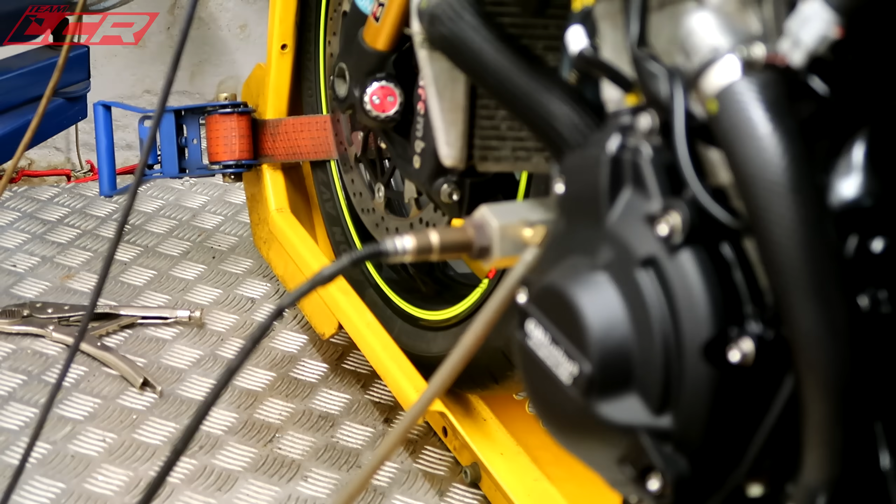So what we've done, we've pulled the information off the ECU onto the software on Mr. X's laptop. So that's all the map information from my ECU. Now he has to map the bike, run the bike, see where it's lean, and then make the adjustments here, which are then loaded back onto the ECU.

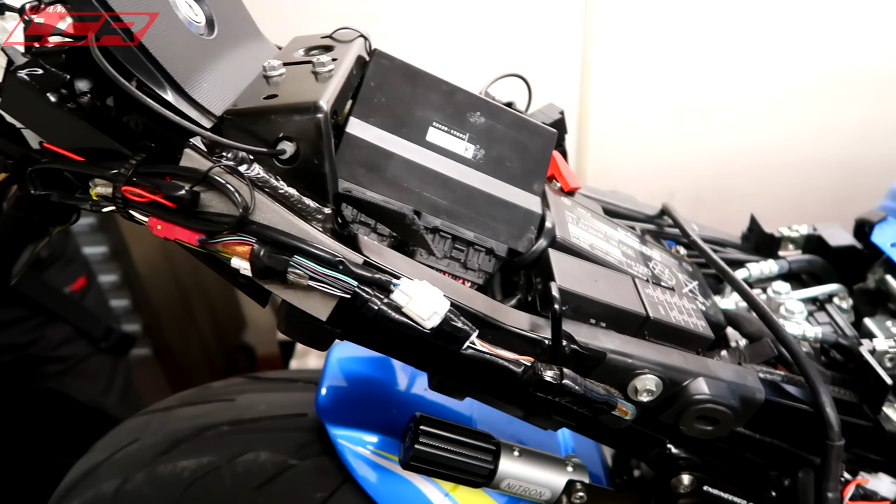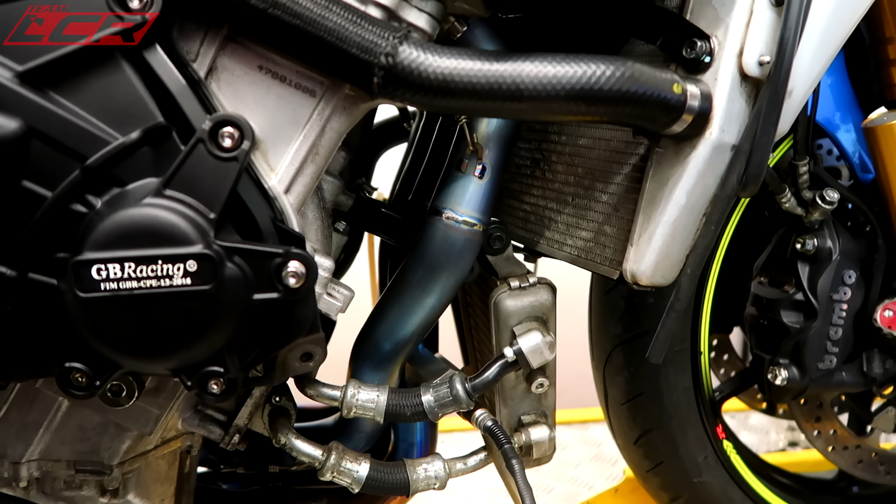This is going to be tuned per cylinder, so it's not tuned at the tailpipe, which is where all of the headers gases combine. This is actually being mapped at 2 cylinders - I think it's cylinder 2 and cylinder 4 because they share the same map. Every cylinder has its own map on the stock ECU, so you have to map each cylinder differently, but because the map for cylinder 1 and cylinder 4 are more or less identical, and the map between cylinder 2 and cylinder 3 are more or less identical - I could have it the wrong way around actually - there's 2 of them which are more or less identical, so we're mapping at those particular cylinder levels and then just replicating that map to the other of its paired cylinders.

But just looking at the information from the dyno printout, the air fuel ratio at the exhaust is completely different to what you're picking up at the actual cylinder itself. So one of my cylinders, I think it's cylinder 2 or cylinder 4, is really lean - off the scale at some point with how lean it is, whereas what's coming out at the end of the exhaust is okay because the other cylinders are compensating. But it just goes to show you really need to map at the cylinder level to really know what's going on. Ooh, another Suzuki.

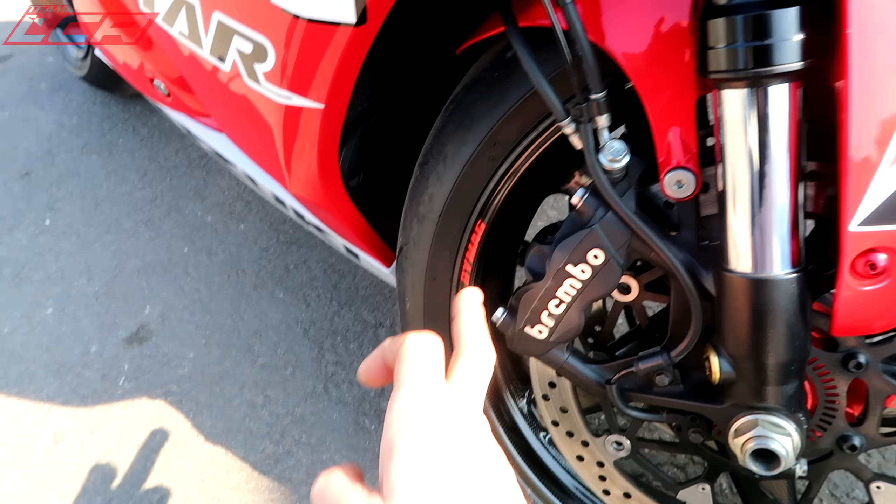Gonna have a little spin on this, because this is Tom's bike. It's been mapped already by Mr. X. He's also got the Dymags on it, which will be going on to mine shortly. But yeah, so it's very similar - it's got the full arrow system, but it's lovely in a really rare red. It's only 200 into Europe apparently of this red, because it was mainly made for the American market, but I didn't realise it was actually metallic.

It's nice. We're going to have a little spin to see what I can expect from mine. Hopefully mine will be very similar to this, but this has got the Dymags on it, the full arrow system, which I think is slightly louder than mine. There's a big outlet on it, and it's in this lovely rare red. He's done a bit of work to it - carbon frame guards, carbon surrounds. Oh, it's gorgeous, isn't it?

Carbon tank covers. But it feels different to mine - it feels different, because mine's got the Gilles clip-ons as well, so mine's got different clip-ons to this. I think this has got the Enduro tank cover, so it sticks out further this way - that's what feels different.

Oh, the direction changes. Wow, that is much lighter on its feet than mine. It's definitely smoother on and off the throttle though. God, it just wants to drop into the bends with these wheels on.

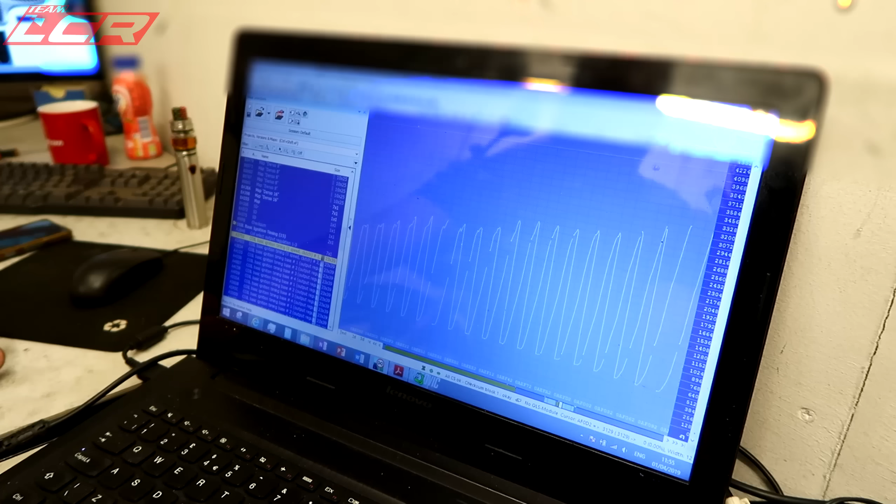I don't know if you can hear just in the distance there, that's my bike on the dyno at this moment. So what we've done, we've pulled the data off the ECU. Mr. X has now made some adjustments to the map offline, so plugging the ECU back into his laptop, here it goes,

made some adjustments. Now they've then been written back to the ECU, and we're doing the first run on the dyno to see how far out we are.

What we've done is we used the map from Tom's bike, Tom's GSXR, with the arrow, thinking it would be close, but actually because the Predator headers have that extra bit of pipe work, it's actually quite a long way out, and we're having to make more.

Actually, a couple of the cylinders are really lean, so we're having to make a lot of changes, sort of 10-15% extra fuel at the mid-range to bring it back in the right area.

And then this is the first run, so there's going to be more runs to get it absolutely spot on, but this is where we are after that initial first changes. Could be a long day.

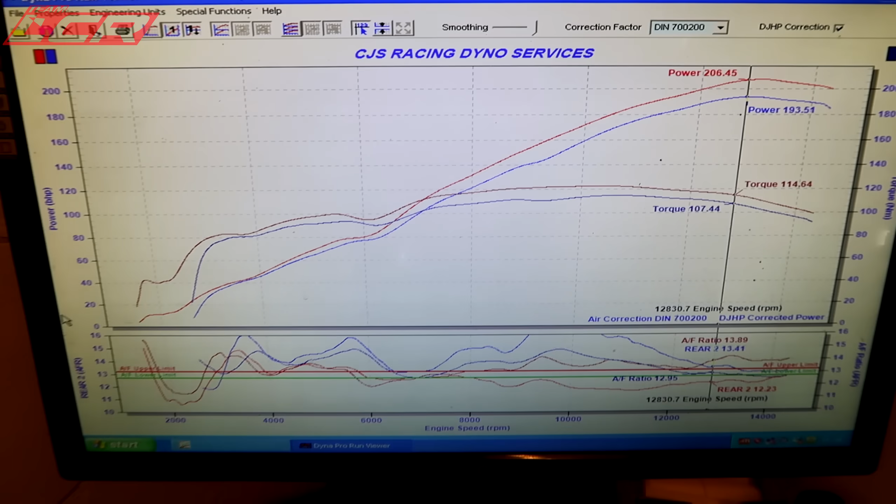So is that before and after you've got on there at the moment, is it? That's before and after at the minute. Christ, there's big old changes already then, isn't there, with that first run. So the red is the current, the blue is the old cylinder fuel ratio.

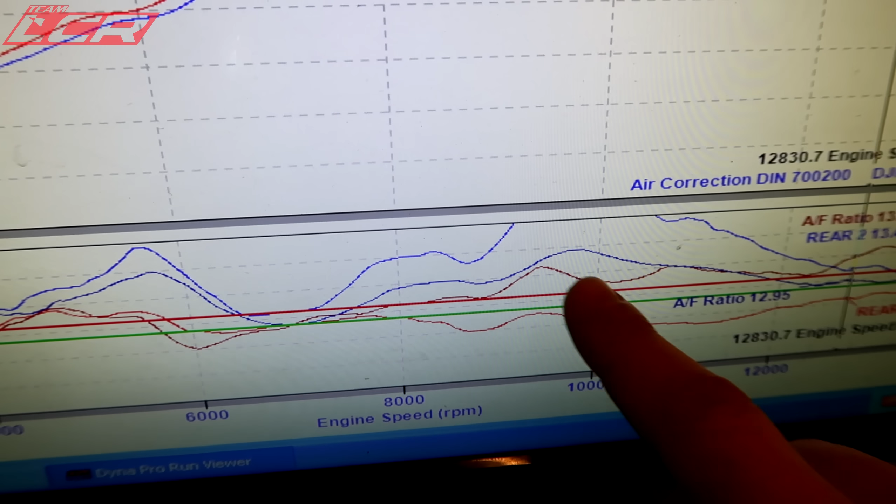So you can see on the old stock map, it's off the scale on leanness. And this after the first run, which has been done, and the first corrections, we're getting where it should be now. So a bit more tuning, which is even nicer.

Okay, time for another run. Tweaks have been done. They've been loaded back onto the ECU. It's a manual process to smooth the graphs out because you've got different maps with different throttle positions.

So the full power run is one thing. That's easy enough to do, to set your fueling and get the full power right. But you've got to get partial throttle, 50% throttle, 12%, 75%, and that's all the different maps. So Mr. X has done that.

This is the second proper run now, so the ECU's back on the bike, it's been updated. We're going to run it again now, see how the graphs look, and it may need a bit more tweaking and one more run until it's finalised. But she is getting there, and already the fueling is so much better. I'm quite excited.

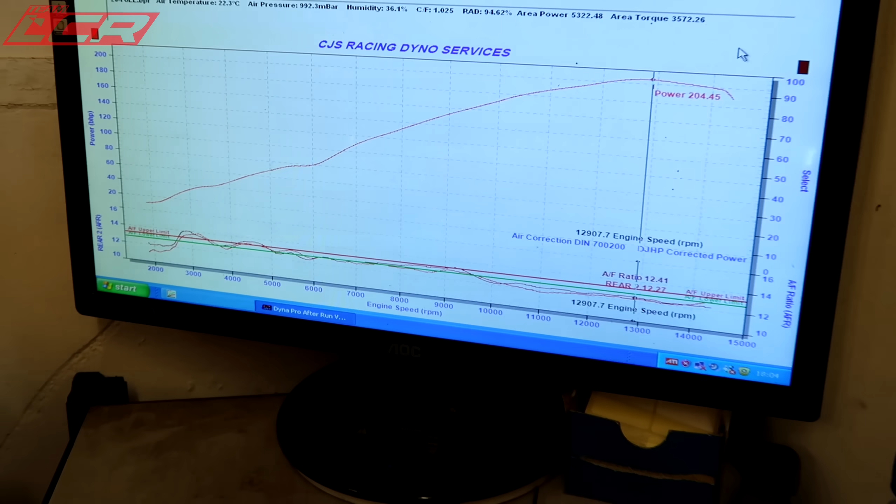Cylinder 1 and 2 perfectly mirrored.

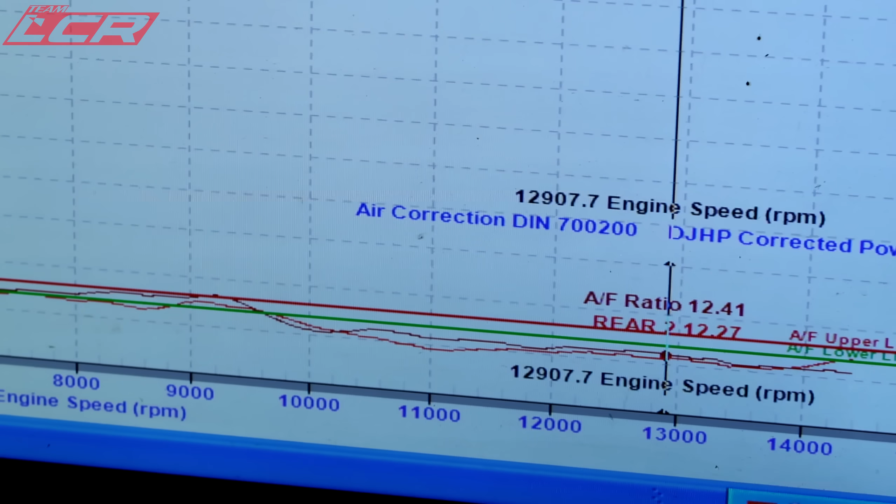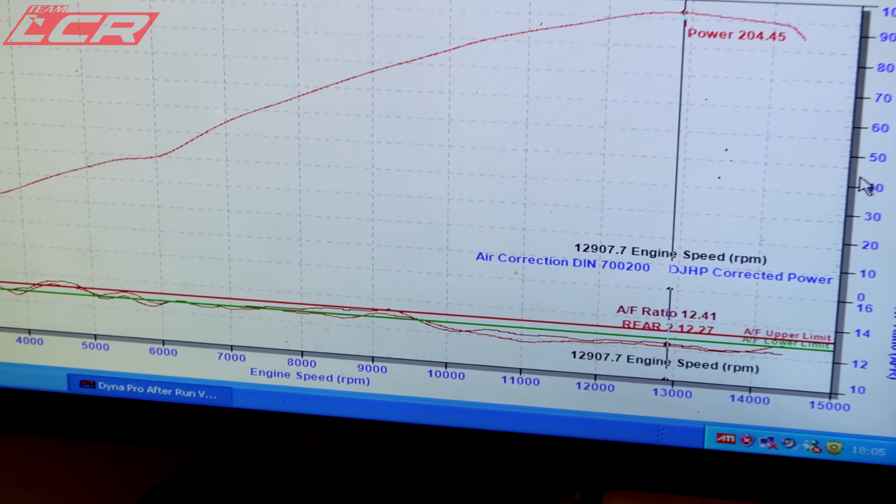Right between the red and the green, very close to it. So from 10,000 revs, I'm going to take out 4%. And that should pull that one in, so I'm going to adjust that now. It's a much smoother graph, isn't it, as a whole?

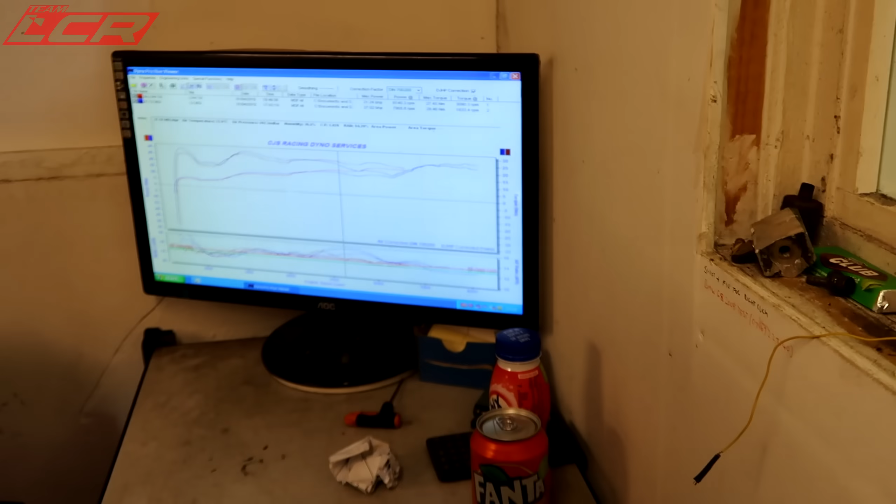Okay, hopefully the final run now after tweaking. Fuel curve's looking really good now, so there's a couple of areas we want to work on just to get it absolutely perfect. But I think full throttle power was sort of 204 last time, 206 originally. Obviously it's getting hotter in the dyno room, so that affects that. But she should be spot on after this run, hopefully. So literally on our 12-degree run, which is where I wanted to improve it.

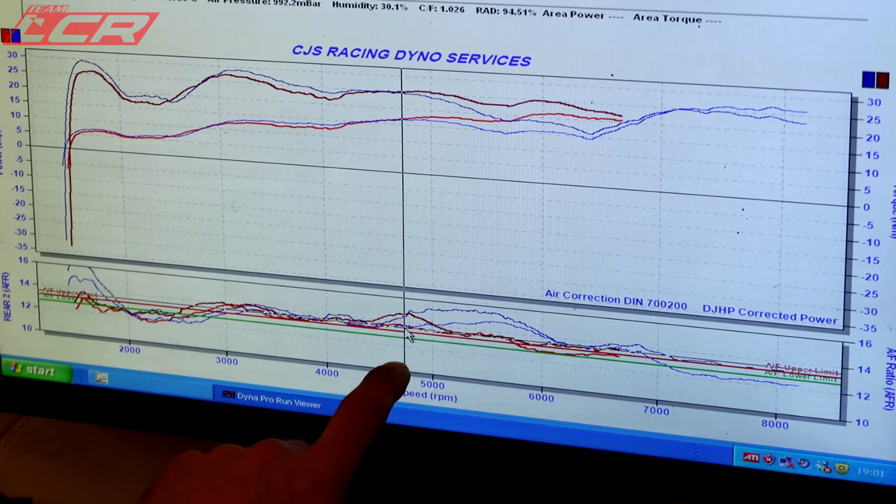Remember, first of all we had 2 humps, didn't we? Yeah, and then we had that 1 hump. Now we've got no hump, but we've still got 4,600. We still need some gasoline there. Oh, really?

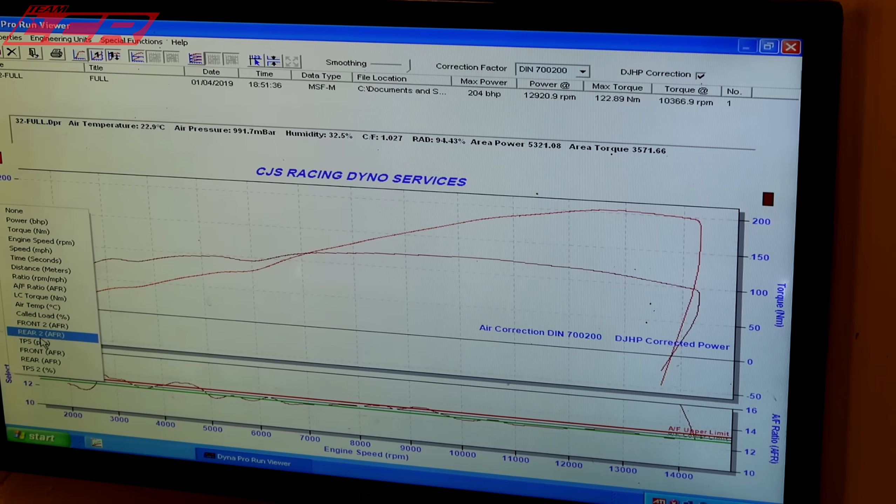So that is cylinders 2 and 3, and that's cylinders 1 and 4. Absolutely flat. Look at that, that's really... Look at that. And what was it for 4? Can you bring out what it was before?

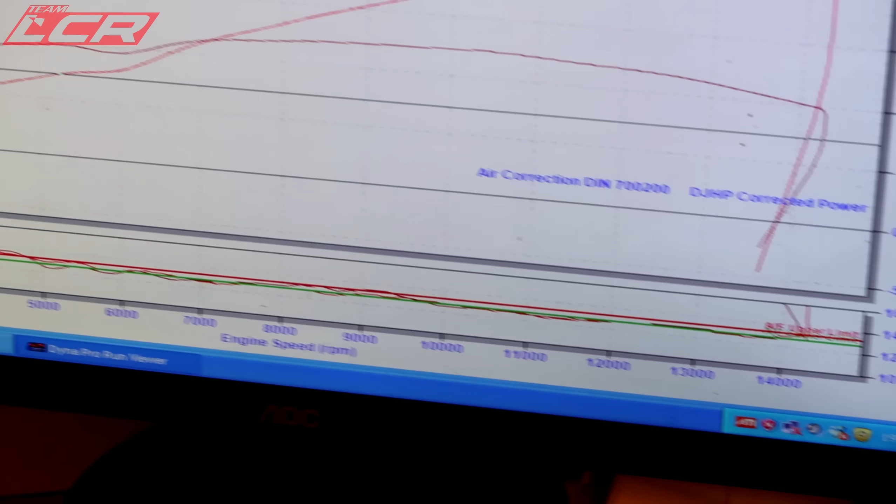Originally when it came in, that's when it came in, the purple. Yeesh, that's the 2 cylinders when it came in. So what one's that's off the scale? Is that cylinder 1, is it? Yeah, cylinder 1. Cylinder 1 was off the scale lean.

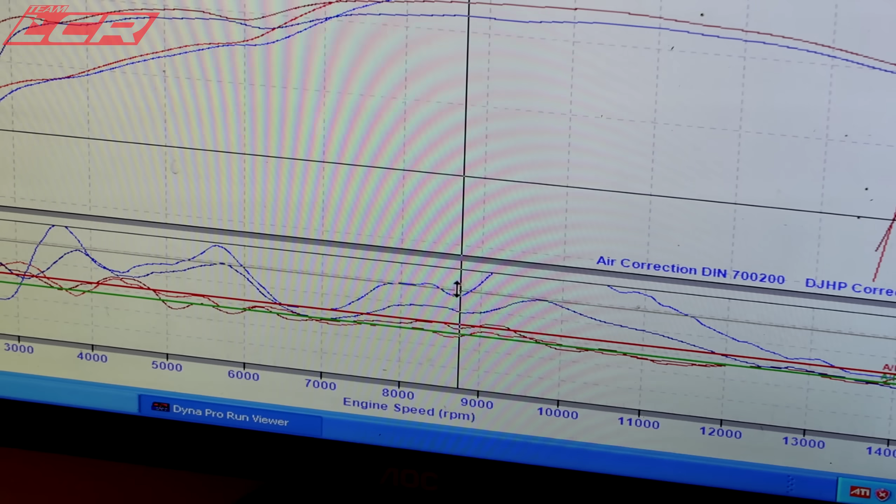Right, so final results. I know you saw basically what power it made there. So she made 104... one of the runs made 204 brake horsepower at the back wheel. You know, dynos differ. I'm not saying the bike makes that much power, but at that dyno that day we saw that much power at the back wheel, which is a huge amount.

More importantly is how much of an improvement we had. But 193, if my memory serves me right, when we first ran the bike on the dyno, I come away with 204. So that's a massive improvement, over 10 brake horsepower at the top end, and an improvement across the entire graph. Here's the graph before and after the bike came in. As you can see, there's a big healthy boost in power all the way through the rev range.

But more importantly, and why I took the bike there, is just to make sure it was running right, to improve the throttle response, which it has dramatically. The bike pulls so much stronger. Unfortunately, it took quite a while to map the bike, and when I left it was dark and it seemed pointless trying to record anything on the GoPro, unfortunately.

So I will go out on the bike, I will repeat the chug test. It's still flat right at the bottom. Below 2,500 revs it's really flat, and I think that's just a characteristic of the bike. The bike revs to 15 grand. Below 2,500 it's flat, and then it really kicks in and builds strong. So from 5,000 revs it pulls like an absolute train.

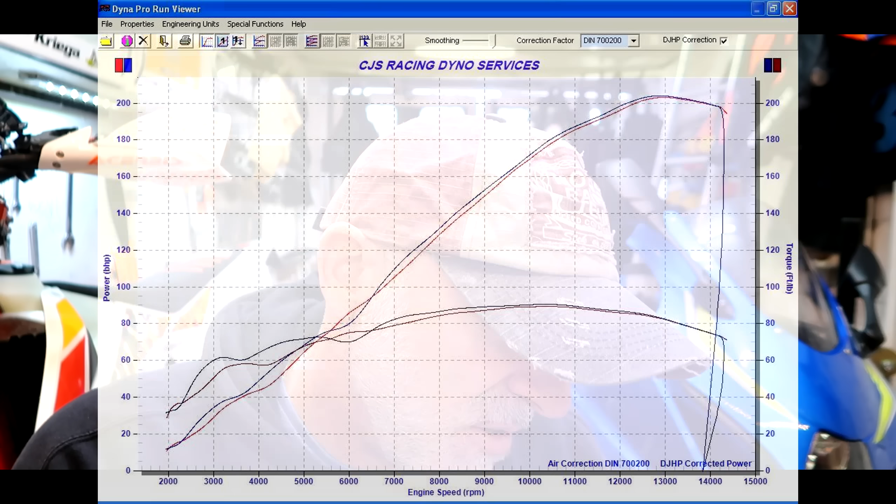What's really interesting is look at this graph. This is a comparison between the Predator system and Tom's Arrow full system, and as you can see, the Predator is outperforming the Arrow more or less everywhere, apart from 6,000 revs where the Predator just dips down and doesn't quite match what the Arrow is doing. So there's a bit of a lump in the power at 6,000 revs with the Predator compared to the Arrow, but above 6,500 it's stronger everywhere, right up to the top. Even below 6,000 actually it's still stronger than the Arrow, so it's just that dip at 6,000 where it lets it down.

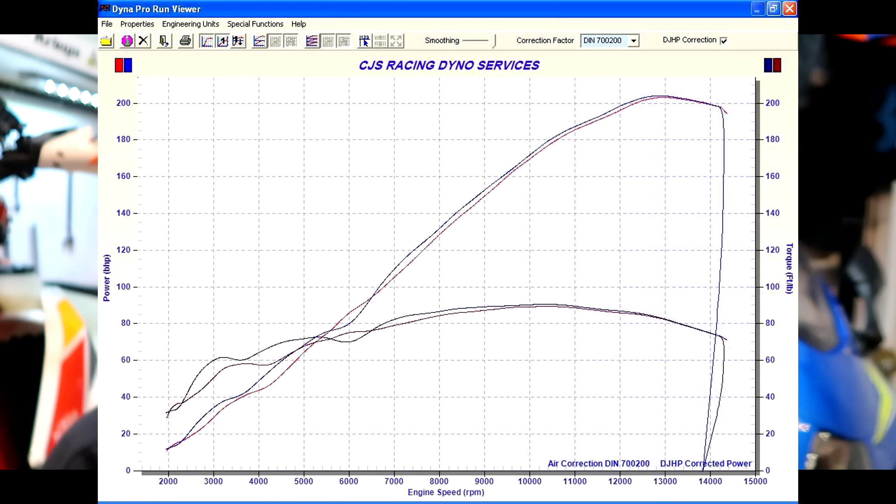And Tom's bike, I think, was a couple of brake horsepower down on the 204 that mine came away with. But I'm very happy indeed.